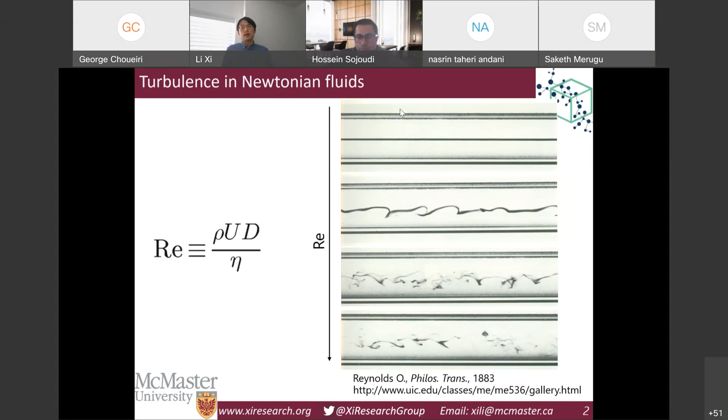That's most studied. We are interested in viscoelastic fluids. By looking at the word viscoelastic, we know that it's basically a combination of two words, right? Viscous and elastic. We know where the viscous part comes from. It's a liquid, so there must be some viscosity of the liquid, right? So what do we mean by elastic? I happen to have a rubber band here on my desk. When we talk about elasticity, we're basically talking about the material having some sort of memory of itself.

So let's say I have this rubber band, and without any force, at equilibrium, it has a certain length. Its equilibrium length, its equilibrium shape. Then I apply a force. I can stretch the material, so it becomes longer, it becomes elongated, right? But if I relieve the deformation,

I want to make sure I don't snap my finger. It's a little scary here.

If I release my deformation, release the force, it will go back to its equilibrium configuration. So an elastic material is something that has a memory. It remembers its old configuration. It remembers its old shape. And whenever you remove the external deformation, it will try to come back.

We make the fluid viscoelastic by basically dissolving some polymers into the fluid. So we're dealing with polymer solution here. At equilibrium, the polymers will coil up into a big blob. And once you have a shear in the flow, the shear motion will try to stretch the polymer, just like when I stretch my rubber band here.

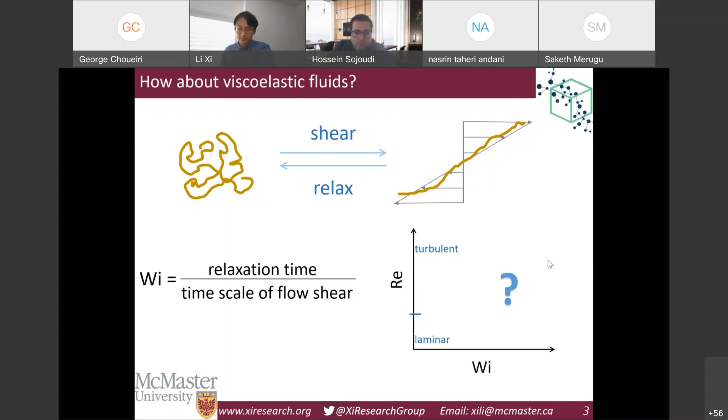Now when we introduce polymers into the fluid, we basically have another axis here, the Weissenberg number, and we need to look at flow behavior in this Reynolds number versus Weissenberg number space. So there are a lot of questions about what happens in this corner. That is what we are interested in: specifically the turbulent flow of a highly viscoelastic fluid, the flow of both high Reynolds number and high Weissenberg number.

And the phenomenon has been studied for a really long time, back to World War II, because of a phenomenon called turbulent drag reduction. So we all know that the friction of a turbulent flow is higher than that of a laminar flow. Basically that means if you have the same pressure gradient, the same driving force of the flow, in a laminar flow you're going to get a much higher flow rate.

It is still lower than laminar flow, but compared with a Newtonian turbulence, you have a higher flow rate. So you have lower friction when we introduce polymers. This is called turbulent drag reduction phenomena, and the amount of friction drag reduction you can get can be up to 80%. So that's a lot of energy saving in fluid transportation.

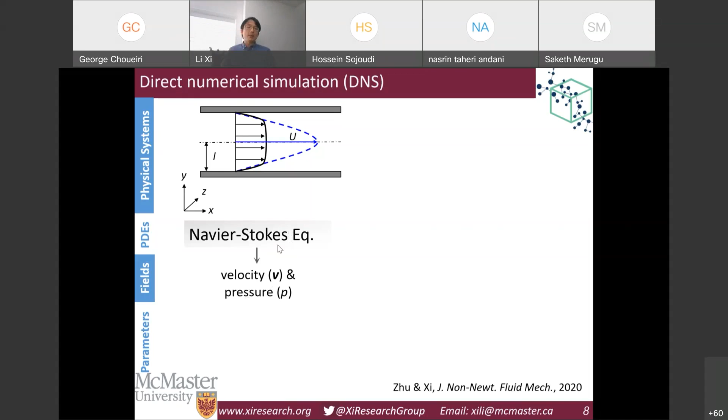But if you have a polymer solution, if you have viscoelastic fluid, you basically need to have a new constitutive equation to tell you how the fluid responds to the flow. That's the so-called FENE-P equation. And this equation is based on modeling polymers as dumbbells: two beads connected by an elastic spring. And we can capture the shape of the dumbbell by the so-called polymer conformation tensor. It's a tensor that we have to solve for, from which we know the stress field and from which we can basically couple that with the momentum balance.

And if we try to non-dimensionalize the equation system, we'll end up with not only one Reynolds number, which was what we knew back in Newtonian turbulence, but now we have 4 non-dimensional groups, right? So the most important one that we have to remember here is, again, Weissenberg number. When the Weissenberg number is high, you're having stronger polymer effect, you're having stronger elastic effects, right?

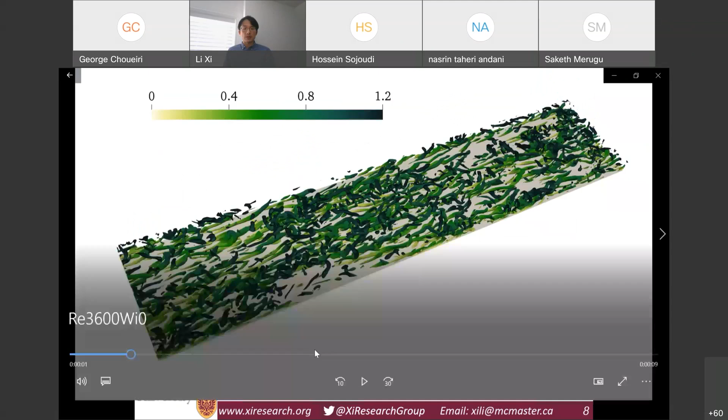So let me just show you some videos that give you a little bit of a direct, intuitive view of what we typically see in our simulation. So what we are looking at here is this channel. The flow is moving in this direction, so from left to right, and the green tubes you are looking at are the vortices in the turbulent flow field.

So not surprisingly, in a turbulent flow field, you have a lot of vortices that keep on evolving in time. They grow from the wall, they rise up, they break up, and then trigger new vortices, and the cycle keeps on as the turbulence keeps on. So the video you're looking at here is for Newtonian turbulent flow. So you remember this picture.

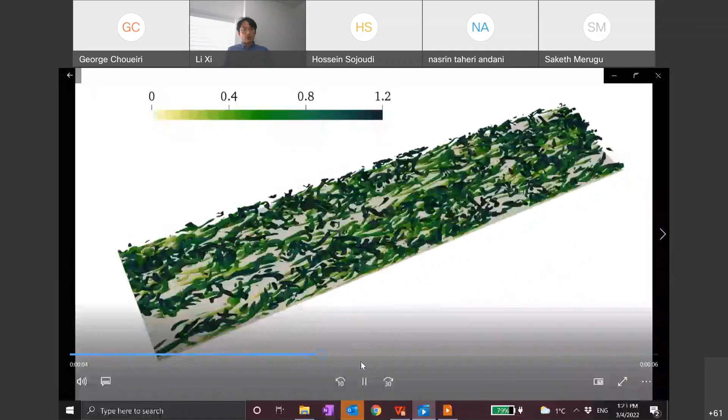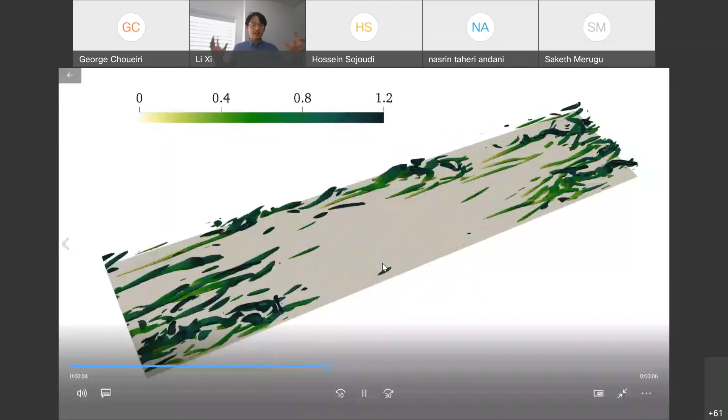Now let me show you another video that is for polymer solution. I assume everyone can see the new video here. Once you use a polymer solution, you can see that I still have vortices, but the vortices become a lot fewer and a lot more scattered. So you can see that the polymers are making the turbulent vortices weaker, and that's part of the reason why we are seeing drag reduction behavior.

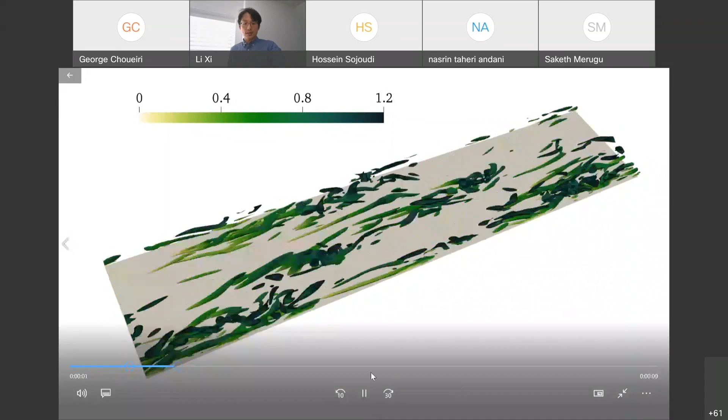So this is just to give you a very qualitative view of what's happening in turbulent flow from our simulation, comparing the Newtonian case versus the viscoelastic case. So let me just stop the video here, and I'll switch back to my slides. Now we look at our solution. We try to do a little bit more quantitative work.

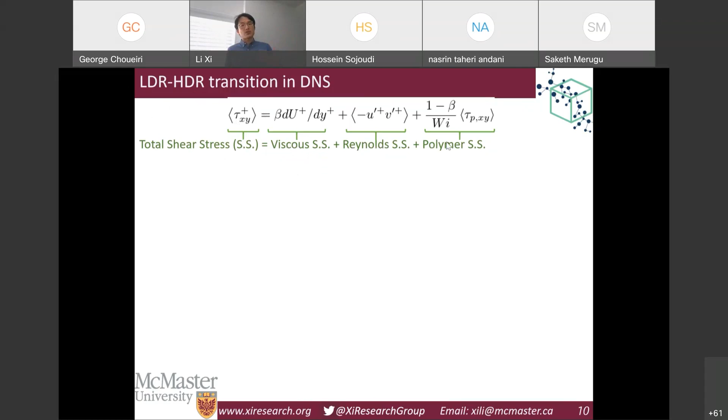Now let's go a little bit deeper into this LDR to HDR transition. What we are doing here is we just decompose the shear stress into 3 components: viscous shear stress, that's basically Newtonian shear stress; Reynolds shear stress, you can remember that as the turbulent shear stress; then polymer shear stress. And you don't really have to figure out what they exactly mean. You only need to look at the shape of the profile.

You can see that in the buffer layer, as you have increasing drag reduction, you have a continuous change in all these 3 profiles, right? They basically change in a straight line, okay? But in the log-law layer, you have a sharp transition happening. So nothing very much happens at low drag reduction, but you start to have a new change at high drag reduction, right? You have a very sharp transition between the 2 kinds of behavior.

And so what we're seeing here is that the transition between LDR and HDR is not a simple quantitative effect of how much drag reduction you have, but it indicates a different mechanism of drag reduction. And the fact that you have this different mechanism basically means that there are at least 2. I say at least 2 because we now know that there are even more. There are at least 2 mechanisms of drag reduction happening here. The first one happens at the onset of drag reduction, which will start the LDR regime. The second one happens at the onset of HDR, which will trigger the LDR to HDR transition.

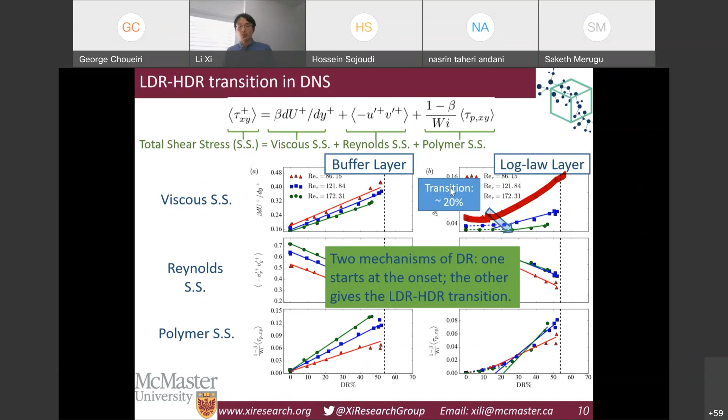This transition does not always happen at 30 or 35% drag reduction like people believe. Depending on what regime you're looking at, it may happen at a different level of drag reduction, but it is a qualitative transition that will happen as you increase the Weissenberg number. So what is this new mechanism? So let's look at why polymer is good at reducing the turbulent friction. So we know.

Again, we are talking about at least two mechanisms of drag reduction, right? So the first mechanism is well known. If you remember the video I showed a few minutes ago, you have a lot of vortices in a turbulent flow. And typically, the vortices are aligned with each other, but they rotate in opposite directions. So in this schematic, the flow is moving into the screen, right? We're looking at the cross section of the vortex here. Typical neighboring vortices are rotating in opposite directions.

And what happens here is it will sweep up the polymers in the middle, bring them up. And once we reach here, you can see that the fluid is going two different ways. So this kind of flow motion will try to stretch the polymers. This is what we call extensional flow. The extensional flow is very good at stretching polymers, but polymer, as I mentioned before, remembers its old configurations. It always tries to pull back. So there's very strong polymer stress that tries to pull things back. And this stress that tries to pull the polymer back is what suppresses vortex motion.

So what if we plot the intensity of vortices, which is measured by a quantity called Q? I'm not going into the details about how that is defined, but just remember Q measures how strong your vortex is. You can see that as you increase drag reduction, the Q magnitude goes down monotonically, right? So this is the first mechanism of drag reduction.

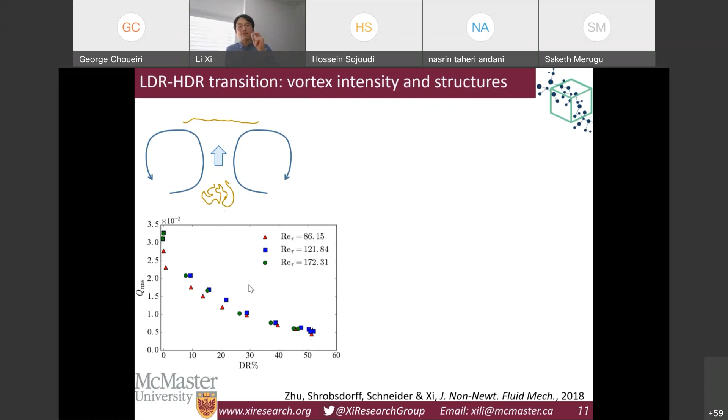So now if you look at the vortex distribution in turbulent flow in different states, what you see here is that at LDR compared with Newtonian flow, the distribution is very similar. You have very strong, high density vortices distributed in the flow field. Whereas at high Weissenberg number, once you reach HDR, you can see that this distribution becomes more sparse.

You have these empty pockets in which you don't have a vortex anymore, and you have these pockets in which the vortices are clustering up. So the vortex distribution becomes more clustered at HDR. So this is something that we first noticed as a distinction between LDR and HDR.

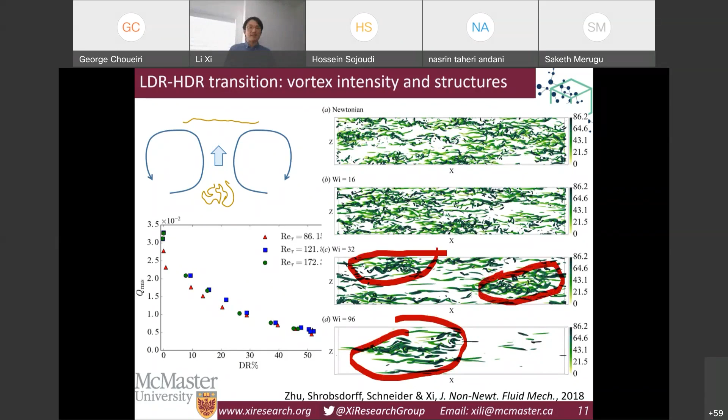For a lot of researchers, this is as much as they would go about concluding the physical message, because we have a turbulent flow, you have all kinds of vortices, they are being generated all the time, and they are all of different shapes. There are numerous of them, and it's impossible to keep track of them by hand. So what we want is, can we be more conclusive?

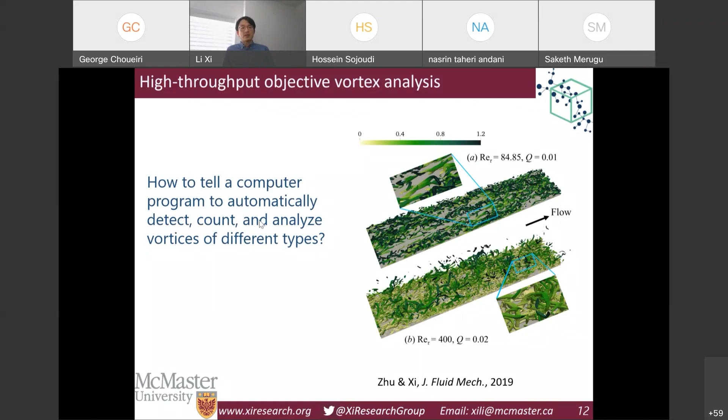Can we come up with a way that can more quantitatively and objectively tell us how many vortices we have, what type of vortices we have, where the vortices are, so that we have a more statistically meaningful conclusion about the vortex distribution and vortex dynamics? So the question we now have is that from direct numerical simulation, we can generate these images in which we have a lot of vortices. Can we tell a computer program how to automatically detect, count, and analyze vortices of different types?

So the algorithm is very much similar to Pac-Man. You have this Pac-Man moving in space in a very smart way, trying to connect these beads. Once we connect them, each time we have a vortex, we can find the center line, the axis line of the vortex. So what we see here in the middle are these very complex vortex objects like this one, and a vortex of this shape is a so-called hairpin vortex.

Okay, I have overestimated how well I can write with my mouse here. But again, I'll type it later. You'll see a typed version.

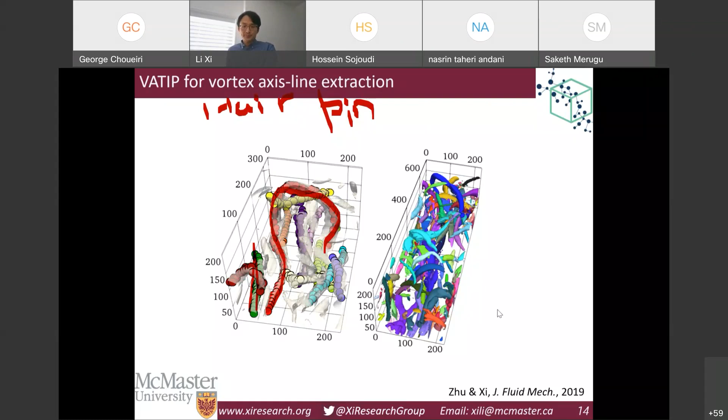It's a so-called hairpin vortex that is very well known and of special importance in wall turbulence. But another type of vortex you will see is these ones. The green one here is mostly linear. It's called a streamwise vortex. So we can capture all different types of vortices, go into direct numerical simulation data, look at each individual vortex, and analyze its shape and position. We apply this algorithm to Newtonian turbulence and the LDR and HDR cases, and you can clearly already see some difference.

In Newtonian turbulence, you have streamwise vortices for sure, but you also have hairpin vortices. At LDR, you can still find the hairpin vortex. It's a clear hairpin. But you also have linear streamwise vortices. At HDR, you don't see so many hairpins anymore. Most of them are very elongated streamwise vortices. You can already see those differences.

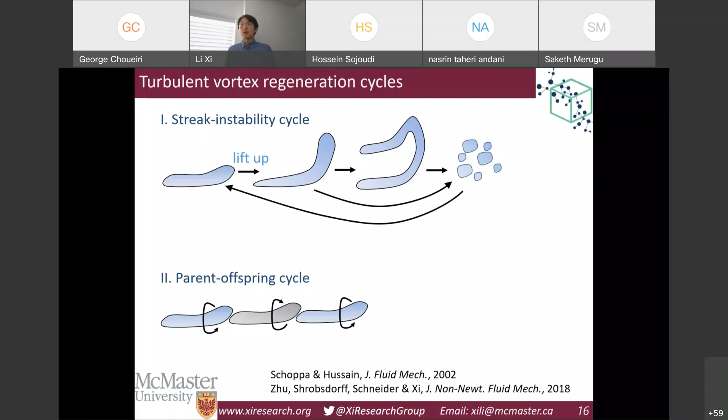So what is the significance of these two types of vortices? We go back to the literature and look at why turbulence sustains itself. Each time we have a vortex, how do the vortex dynamics make sure that once one vortex dies down, a new vortex is triggered? These are called vortex regeneration cycles. This is a highly simplified view.

We classify them into two classes. One is the so-called streak instability cycle. The other is the parent-offspring cycle. The streak instability cycle means that we start with a streamwise vortex. The downstream side of the vortex will go up, which is called the lift-up process. And once it goes up, there will be a lot of turbulent fluctuations as we move away from the wall.

So turbulent fluctuation will try to swing the vortex sideways. Once it is swung sideways, you form this kind of hairpin. The hairpin will keep on growing, but it is unstable. Eventually, it will break up into pieces. And these kind of pieces will cause the disturbance that will trigger the new vortex being grown.

The parent offspring cycle basically means that if you have a vortex and it doesn't lift up, but still you have this kind of rotation, the vortex will create a very strong shear layer between the vortex and the wall. And the instability of this shear layer will create another vortex immediately upstream or downstream. And it basically can create a new vortex that is next to the old one.

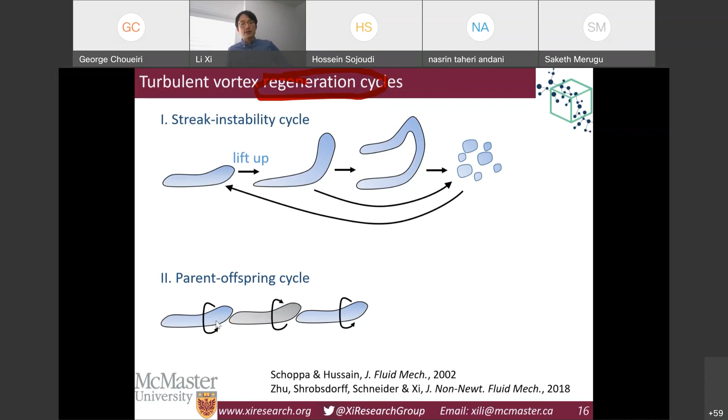So you can see the difference between these two is that in the first mechanism here, it is non-local. That means that the new vortex does not have to be generated right next to the old one. Whereas in the second mechanism, the parent offspring mechanism, it is localized. The new vortex is always generated next to the first one. And in both mechanisms, you have streamwise vortices, right? But only in the first mechanism will you generate hairpin vortices. So this is just to give you a little overview of what theories are there about vortex regeneration.

Now we go back to our data. If we have a vortex, I can measure its minimum wall position or its maximum position. So if these two positions are similar, that means that the vortex is lying flat, right? So I can plot this maximum position versus the minimum position, and if these two are similar, the distribution will fall along this diagonal line. That basically means that your vortex is lying flat.

But if the maximum position is much higher than the minimum position, that means that the vortex is lifting up, right? Like this one, Y max is much higher than Y minimum. So it's lifting up, and that means you are looking at this span. What we're seeing here is that if you look at streamwise vortices in Newtonian flow, you have both these lift-up and flat vortices. But at HDR, you can see that we still have flat vortices, but you don't have these lift-up vortices anymore. So having high elasticity is suppressing the occurrence of these lift-up vortices.

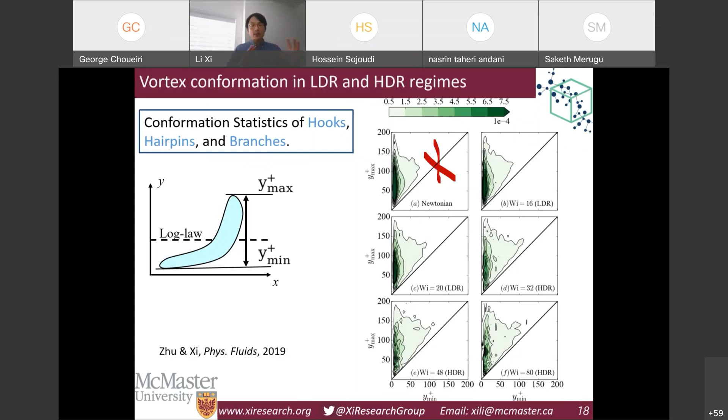Now, if we look at hairpin vortices, we do the same thing. What we find here is that there's no such thing as flat hairpin vortices at all. All hairpins are lifted up. They are all at this span, right? But the span becomes weaker and weaker. So they only come as a result of lift-up.

So let's summarize what we have here. The physical picture is that if you have a Newtonian flow, you basically have this kind of self-sustaining mechanism in which you can generate a vortex. The vortex will grow into a hairpin, right? The hairpin will break up, and it will trigger a new vortex somewhere. And what LDR does is that it makes all the vortices weaker in general. There's an across-the-board weakening of vortices, but it still largely follows the same mechanism.

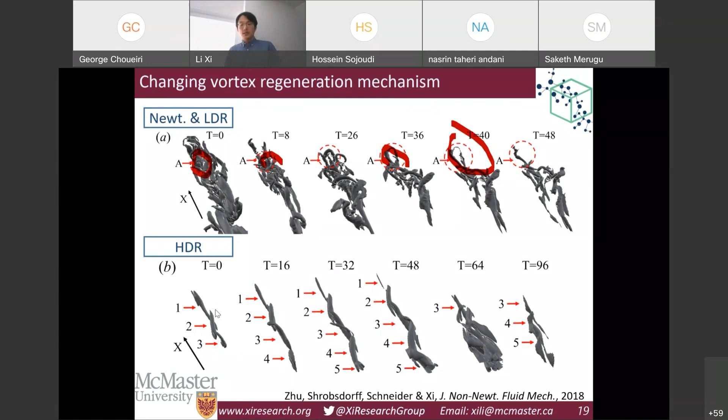But at HDR, what happens is that HDR will prevent the vortex from lifting up. So it will prevent the generation of the hairpin vortices. Instead, the mechanism will be dominated by the parent offspring mechanism. This mechanism by nature is localized. That's why in HDR you see localized vortex pockets, clusters. So at this point, we think that we have a very good understanding about the transition between LDR and HDR, right? So let's take a little bit bigger picture here.

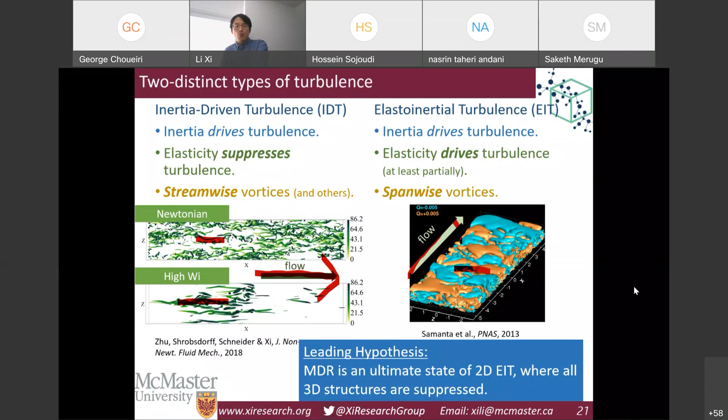But there's a very important question about the hypothesis. If this EIT state, this elastoinertial turbulence state, is MDR, why is it insensitive to different polymer solutions? It's very hard to believe, because if elasticity, the polymer, plays such an important role in sustaining turbulence, why is it not sensitive? It does not reflect in the mean flow. So we have some doubts about this hypothesis. That's why we conduct this test.

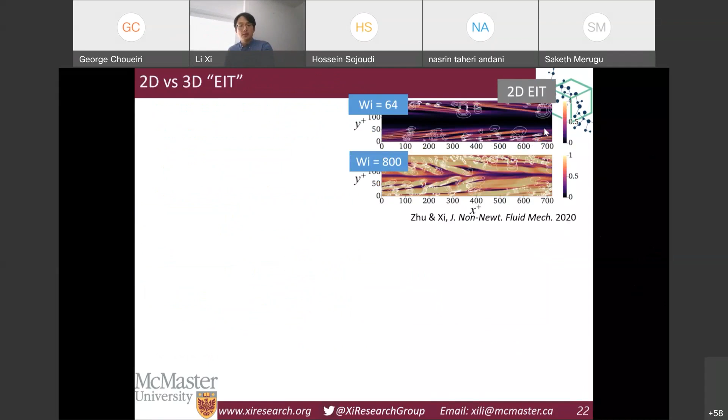First of all, we find the EIT solutions in a 2D flow. So if you say that MDR is the 2D limit of EIT, let's just look at the 2D limit of EIT and whether that looks like MDR or not. So if we have 2D EIT, again, we look at the turbulent flow friction as you increase Weissenberg number. What we are seeing here is that as you increase Weissenberg number, you have higher and higher friction. So first, friction doesn't reduce. Second, friction doesn't converge to any plateau that MDR should give you, right? We never get MDR behavior in a 2D flow.

And if I repeat my simulation with a different polymer molecular weight, if I make a longer chain, experiments tell me that at MDR, you should get the same mean flow, but we are getting different mean flow. So we can conclude now that the 2D version of EIT never gives you convergent friction drag. It never gives you MDR behavior. MDR cannot be this 2D version of drag reduction.

In order to have drag reduction, you have to have 3D flow. So if you do simulation in 3D flow, this is what we found. You can see that you have drag reduction, eventually converging into a plateau. You have this MDR behavior. You only have MDR behavior in 3D flow. So the simple 2D EIT answer is not sufficient to explain why we have MDR.

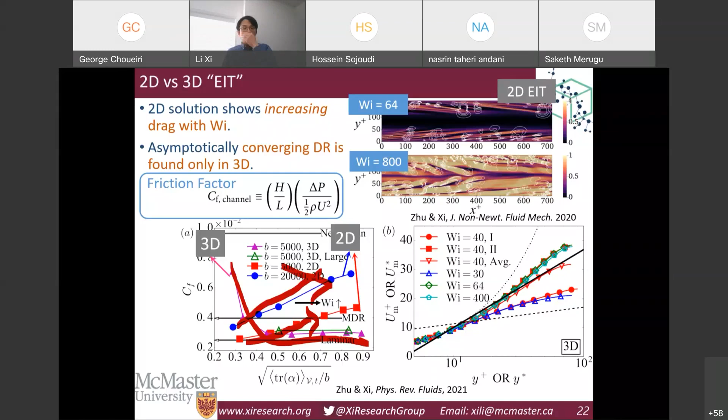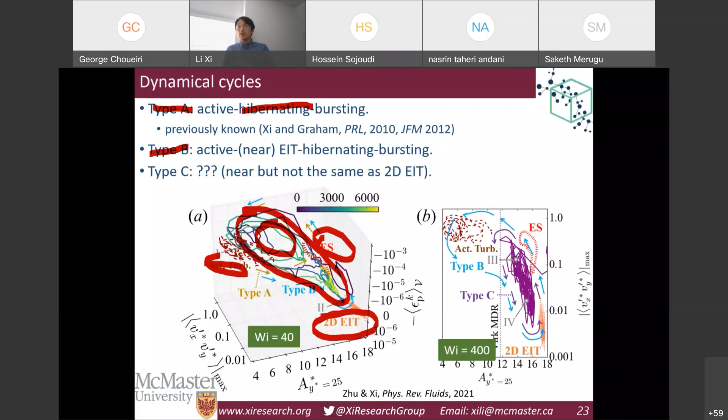And as you further increase Weissenberg number, at very high Weissenberg number, this is where the type B cycle is, and you can see that even the type B cycle becomes irrelevant. You end up with another cycle called the type C cycle. So we can see at least two or three different types of cycles here. And these are time series, and we can see this behavior in these time series as well.

You can ignore these more detailed annotations here, but basically the type A cycles are these kinds of dips you're looking at here, right? And type B cycles are these much longer dips. We know these are type B cycles because if you look at this part, the rate of energy conversion from elastic energy to turbulent energy is positive. That means that elasticity is feeding into turbulence.

Then for the type C cycle, what you see is an entirely different kind of fluctuation. It's quasi-periodic and happens at a much higher frequency. So there are three distinct types of cycles happening here. Now let's go back to the overall picture of the so-called multi-stage transition in turbulence. Again, for the same Reynolds number, we look at what happens when we increase Weissenberg number. The top row is what happens in the phenomenology, in the flow measurement, things you can see in experiment. We know that you have no reduction, LDR, HDR, and MDR.

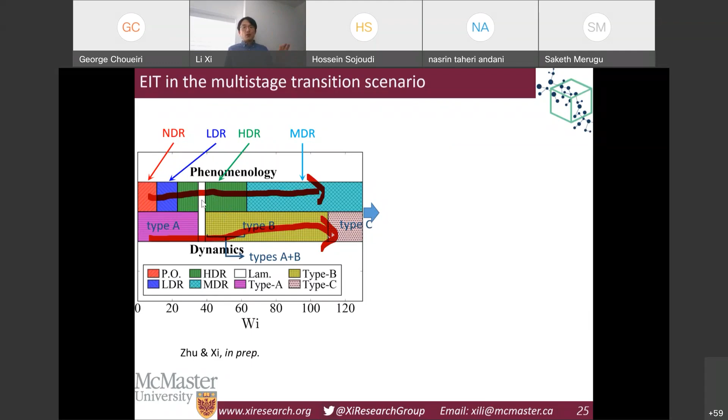The bottom row is what we think is happening in the underlying dynamics. So the no drag reduction section, LDR, and the first part of HDR belong to the type A cycle, right? So the initial vortex lift-up and suppression all happen here. Then after that, we have a laminar window. Then we have another stage of HDR. So notice that what people think of as HDR is not even one stage. These are two distinct stages of dynamics.

And that's where the type B cycle becomes important, and the type B cycle continues to dominate until well into MDR. Then you have the type C cycle. And once you reach here, what do you see? If you look at the time correlation function of the type C cycle with increasing Weissenberg number, it doesn't really converge. You have higher and higher fluctuation and longer periods. So even the type C cycle keeps changing with Weissenberg number. Remember that earlier I mentioned the dominant hypothesis was that at MDR you converge to some ultimate state which is no longer changing with Weissenberg number.

What we see here is that at MDR you don't have one single ultimate state. You have very different dynamics. You have both type B cycle and type C cycle dynamics, and even the type C cycle dynamics continues to change, even though the apparent mean flow is not changing in MDR. So MDR is not in one flow state. It is a group of flow states that is constantly changing with the level of viscoelasticity.

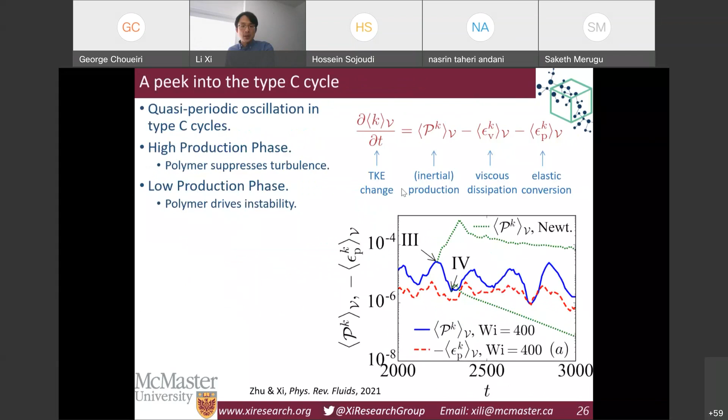And by that, I would conclude that the reason why, after half a century, we were still not able to explain MDR is maybe because we have been looking in the wrong direction. We shouldn't always be looking for an ultimate state that doesn't exist. Right. So this is the key conclusion. The dynamics continues to evolve with Weissenberg, even after your flow has converged to MDR. So I'll skip these more detailed descriptions of these cycles because I think I've already covered the most important message here.

So just a little summary. Our focus is on viscoelastic turbulence, the rich dynamics that happens as you increase Weissenberg number, as you make the fluid more and more elastic. We know that phenomenologically we have drag reduction behavior changing from no drag reduction to LDR to HDR to MDR. What we have uncovered here is that the underlying dynamics change from type A cycle to type B cycle to type C cycle. And from this picture, we can already explain the LDR to HDR transition.

But we also opened a new can of worms; there are a lot of things that we didn't realize before. There are actually two different HDR stages. We still don't quite understand the second HDR stage, and we don't really quite understand MDR, right? So as mentioned, we understand the reason for the first HDR stage, but we don't understand what happens in the second HDR stage. And eventually for MDR, we basically find that the old assumption no longer works. We don't have a single ultimate state for MDR anymore.

And what we call EIT, we may still consider MDR to be more or less relevant to EIT. But we should re-examine what we mean by EIT. It is not even one kind of flow state. EIT can be considered a very general umbrella term that covers a group of different behaviors that includes both our type B and type C cycles. And we don't really fully understand that. We don't really know why that gives rise to MDR behavior.

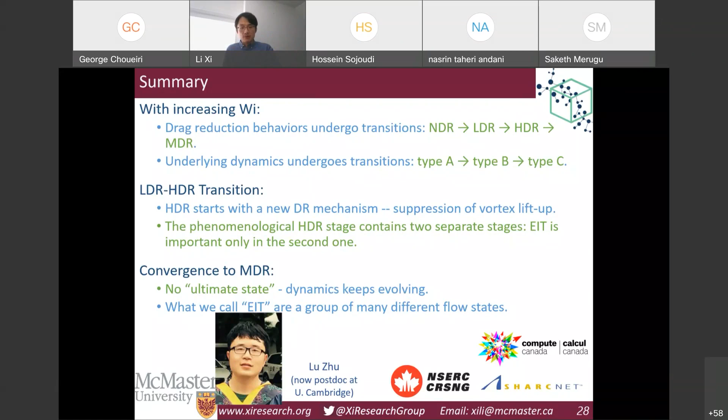When you increase Weissenberg number, when you increase concentration, all kinds of elastic instability will keep on changing as you change these parameters. But it just so happens that when the turbulence is changing, when the instability is changing, as we change the Weissenberg number, as we change the polymer concentration, it's not reflecting in the mean flow. It's more reflecting some of the fluctuating properties, which have not been looked into in much detail in the past.

And both of them give you the same average friction. If you do a time average, at least within the experimental statistical uncertainty, you see almost the same friction level. But what's hidden behind that is the characteristics of the fluctuation, and that's the key. Understanding why all these different flow states just choose to converge at this friction level is key to understanding MDR. I know I didn't answer your question, but that's as much as we know at this point.

All right, thank you. That's fine. I've always looked at the experimental results of MDR, and everybody agrees that things are constant. But if you just look at it, there's actually a lot of spread there. So is it possible that we're not reaching a constant, which is MDR, but we have a narrow spread around the region? Is that a possibility? That could certainly be a possibility. Okay, thank you.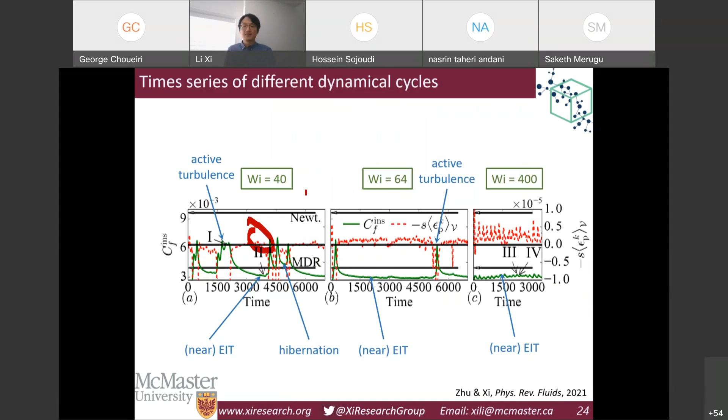So while we wait if there's any more questions, I think one of the more difficult things to understand for people who just started their graduate studies, if you're not doing numerical simulation work, is these plots in wall units, so the Y plus versus U plus. So maybe if we can clarify what this is. Is this just basically what the flow profile looks like, and what is the connection with friction factor? Could we elaborate a little bit on that, Dr. Xi?

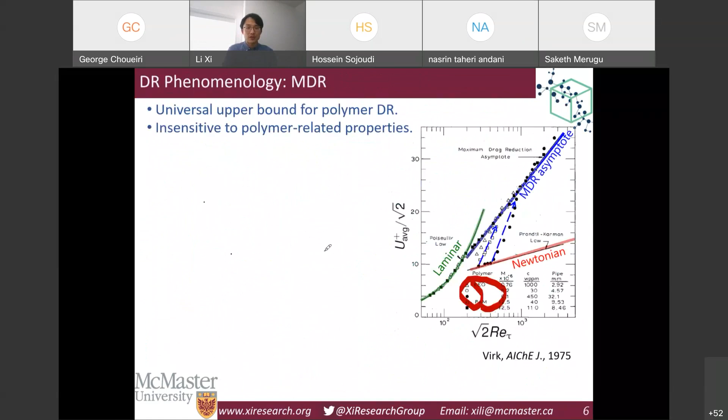Yeah. So this is something that I was trying to hide under the cover, because it's not only difficult for people on the experimental side, it's difficult for everyone who studies turbulence. Part of it is because turbulence is a field that has been studied for hundreds of years, and there's so much established terminology. A new graduate student has to spend a lot of time to find their way across all the terminology.

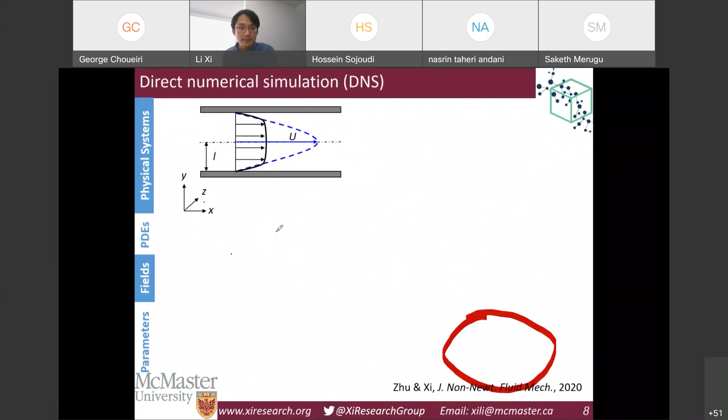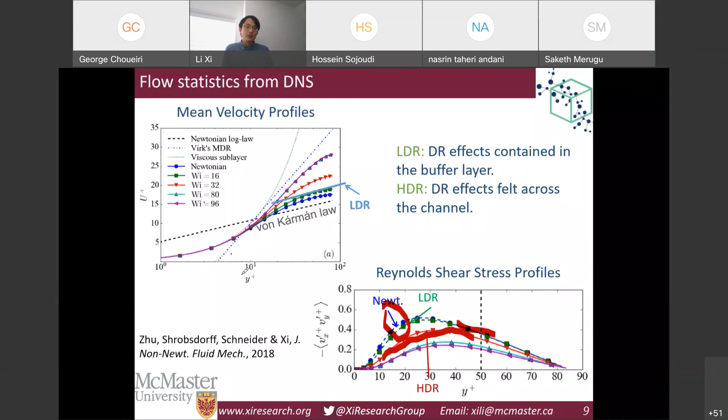So what George was referring to, I have highlighted everything here, so it's a little hard to see. Let me just go to the other plot here. You can see that I have this little plus sign in my velocity and length units here. What we are doing here is that in fluid mechanics we are notorious for trying to non-dimensionalize everything we do, right? So if you have a channel flow, it is very common that we will non-dimensionalize velocity by the mean velocity. More commonly in experiment, you'll be using mean velocity to non-dimensionalize all the

velocity in your system. You'll be using the diameter of the pipe or the height of the channel to non-dimensionalize all the length units. And if you non-dimensionalize the equation system, that's how you end up with a Reynolds number in your equation. That's something you should have learned from undergraduate fluid mechanics, right? We call this non-dimensionalization so-called outer units. But in turbulence, a lot of interesting physics happens in the near wall part.

That is very close in this near wall part. When you look at the vortex generation or the vortex dynamics in this near wall layer, when you look at all the players in this layer, the other wall is just too far away. It doesn't really feel the influence of the other wall, right? So the overall height of the channel is irrelevant here. Okay, I think I'm messing up, but you get the idea.

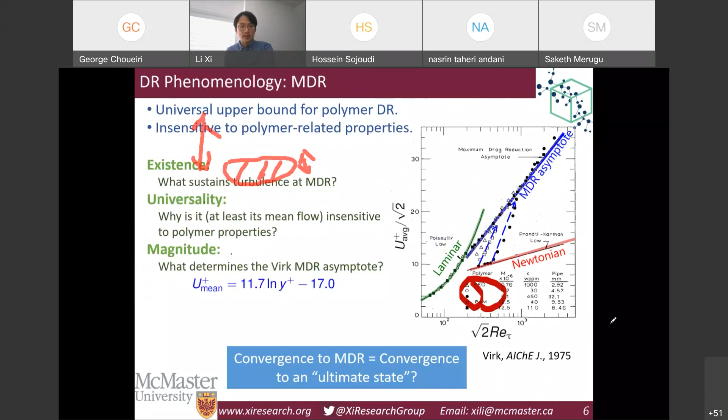What matters here is how high your boundary layer is. This is a length scale that matters to you, right? Similarly, for the physics in this small region, the mean flow of the overall channel is no longer relevant. What matters is the velocity in the near wall layer. So if you rescale the velocity and length using units in this layer, we call that inner units, and we use a little plus. Whenever we show our results in inner units, we'll show that with a little plus. The biggest evidence of the success of this approach is the law of the wall I was talking about, right?

So you have this von Kármán law. So basically, if you have a Newtonian turbulent flow for different Reynolds numbers, if you scale everything in outer units, if you use the channel height, if you use the overall mean flow, you'll get a different flow rate. But if you scale that in inner units, in the length scale that corresponds to the boundary layer, in velocity that corresponds to the near-wall velocity, then everything will collapse onto the same profile for different Reynolds numbers.

That just shows you that these inner velocity scales, these inner length scales, are the relevant scales for the turbulent behaviors in near-wall turbulence, which is where the drag is being generated.

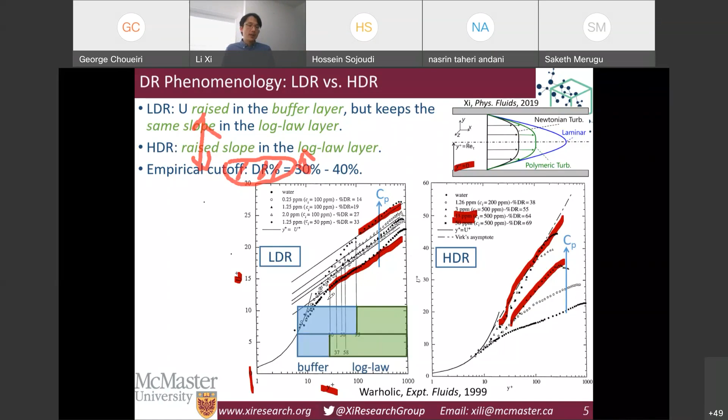That being said, there have been some recent efforts trying to connect the two worlds, trying to connect the relaxation time in simulation with something that you can measure in experiment. And most of the efforts that I have seen focus on measuring the extensional rheology of the fluid, and from the extensional rheological properties of the polymer fluid, you can estimate a relaxation time. So you can get some sort of connection between the two.

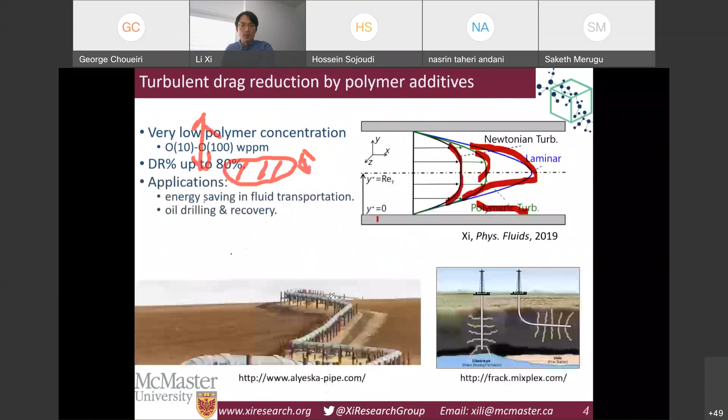But again, so far I haven't seen any direct agreement between experiment and simulations in that sense, partially because in simulations, the Weissenberg number we have here is very well defined. If you recall, we use a very simple dumbbell model, right? So our polymer only has 2 beads and 1 spring, and it only has 1 relaxation time.

But in real experiments, the relaxation time is not one single relaxation time you are dealing with. You have a spectrum of relaxation times, and the number you get depends on what kind of measurement you are getting. So in that sense, it's not easy to draw a direct quantitative connection between these two.